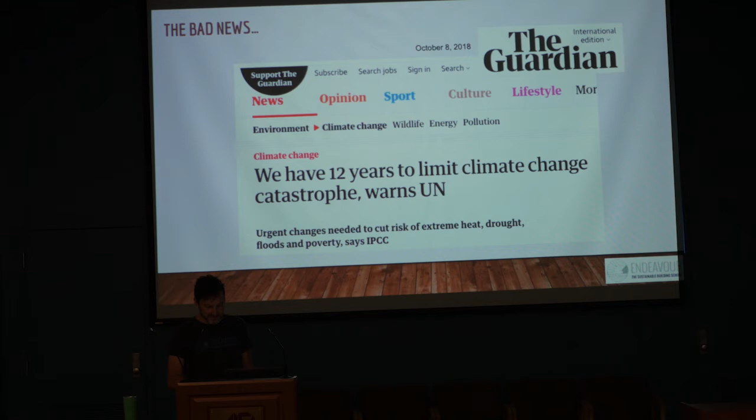I'm not going to spend any time browbeating you about climate change. Presumably, if you're in this room, you have some sense that it's real, and some sense that we should probably be doing something about it fairly soon.

But the thing that has really been motivating me—and I come from a practice where energy efficiency as a climate change response has been a big part of my work—is the realization that we can't just reduce the emissions from buildings and hope to have the kind of impact that we need on climate change.

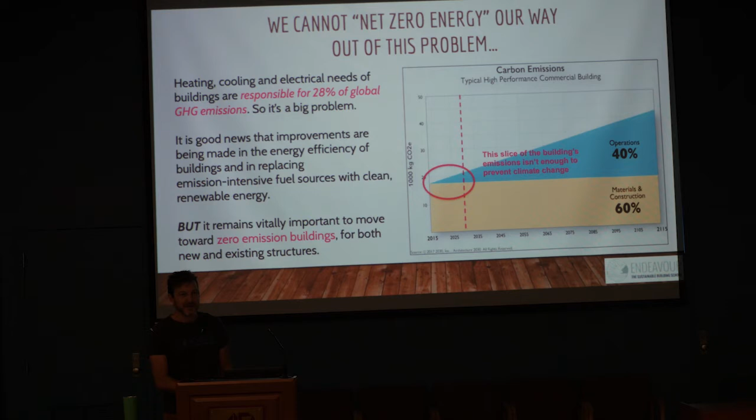So the term embodied carbon is what the academic community and the building world has sort of picked as a term for the emissions that are due to materials being harvested and manufactured. I think it's a terrible term because it makes it sound like we're talking about carbon that's in the materials, which we're not.

But the term embodied carbon is basically adding up—if say I'm going to pour some concrete—adding up the emissions of taking that limestone out of the ground, the equipment used to do that, transporting it to a cement factory, the fuel that goes into those kilns, the CO2 that comes out of the rocks as you're heating them up, basically all of those emissions the whole way along in order to create a material.

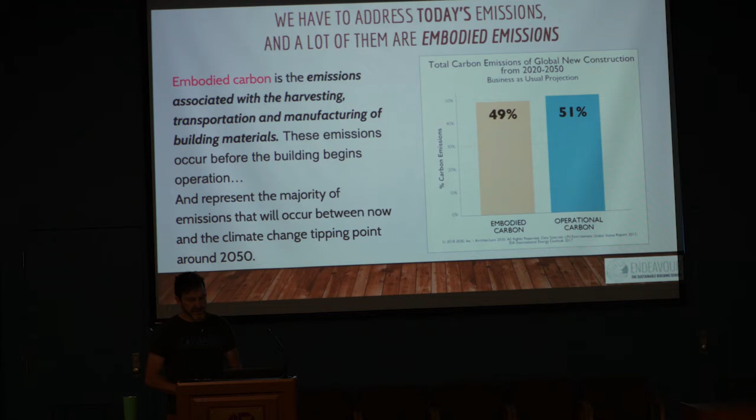And so you can see, again this is from Architecture 2030, their numbers, but between now and 2050, they're seeing that about half of all building-related emissions will be from making materials, and the other half will be from operating buildings.

So if we're going to address the whole notion of needing to build with materials responsible for smaller quantities of those emissions, we need to know the numbers associated with various materials, and how to know what's a good choice versus a less than good choice.

Mostly these numbers come from reports called environmental product declarations, or EPDs, and that's a sort of third-party document. A material manufacturer hires a third party to look at their entire production facility and come up not just with embodied carbon figures, but a whole host of environmental impacts.

So you can see there's global warming potential, which is what we're looking at for embodied carbon, but they also have acidification, eutrophication, ozone depletion, smog, and resource use across the entire spectrum of making that product.

But we're basically taking that GWP, that global warming potential figure, given for a particular unit of a product. So if I'm designing a building, I can say I'm using X number of kilograms of that product, or X number of square feet or cubic feet, however the global warming potential has been expressed, and multiply that out by the amount of material I'm going to use to get a sense of the carbon footprint of those materials.

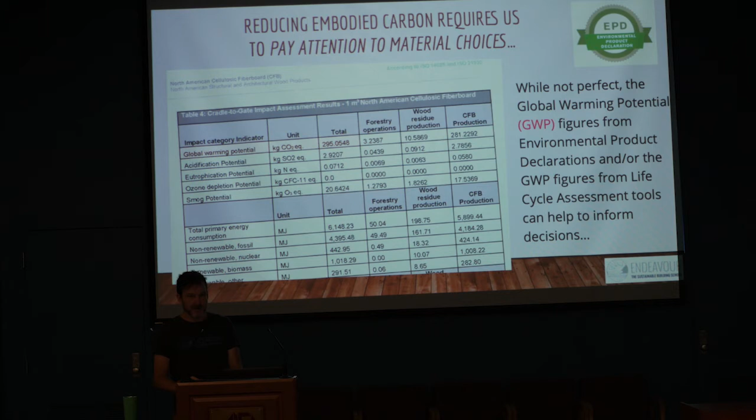So I had been working with these numbers for a while. I came across this notion of embodied carbon in 2012 or 2013. A British group at the University of Bath released a publicly accessible database of the embodied carbon of a really wide range of building materials. It's called the ICE database, the Inventory of Carbon and Energy.

At the time, I was writing a book called Making Better Buildings, where I was trying to give readers a bunch of definable categories for sustainable building materials. When I started the book, embodied carbon wasn't really on my radar—I don't think it was on very many people's radar at that point—but I stumbled into this database, and I thought, well, here's all these figures, I'll attach them to the materials I'm looking at.

It was a fairly easy thing to do. And then as I started to do that, it dawned on me that some of these numbers were really, really big, and kind of alarmingly large, and some were really surprisingly small. So I started doing this type of carbon footprint analysis for the buildings I was doing in my own practice, and getting some really interesting numbers.

In fact, most of my buildings were getting negative numbers, which I'll get into in a second. But that made me think, well, I'm just doing this like a citizen scientist—I should really go to school and learn how to do this properly. So 3 years ago, I started a master's degree at Trent University to specifically look at embodied carbon in buildings.

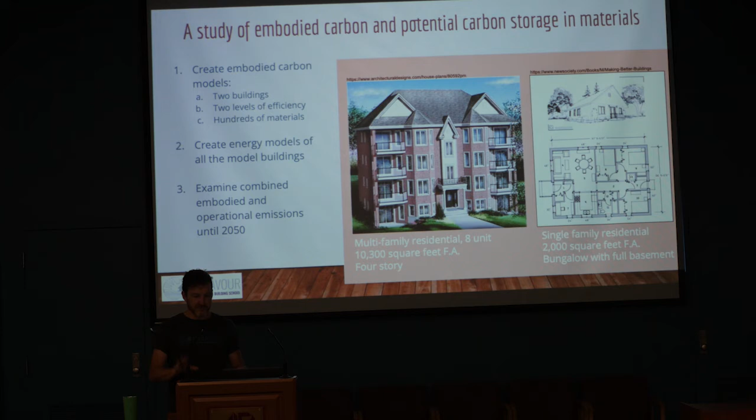And then I also did them as though they were being built to meet the net zero ready energy codes coming in Canada in 2030. So basically, what happens if you just build it at the minimums right now? What happens if you improve the energy efficiency? And I wanted to see, were there trade-offs? Were we actually causing more emissions by adding more insulation than it was going to save in operating? And then I also created energy models for those buildings, so I had an accurate sense of what the operational emissions would be for both buildings in both forms of energy efficiency. Then I put all the numbers together to see how the embodied and the operational emissions compared to each other.

So for the data nerds in the room, these are the R-value factors and some of the assumptions for both the energy efficient and the code compliant versions. Our energy codes in Ontario are actually pretty good right now. When I started the study, I was working with the previous version of our code, and the numbers were a lot different. But now in our area, R60 is the minimum in a roof, which is pretty hefty for most places, and walls are in the R24 range — it's a pretty good code minimum. The results looked more interesting in this study when I was using the older code, but there's still a lot of interesting stuff that comes out of them.

The floor area for the buildings was always kept constant. So if I was adding more insulation to the building, I was adding it to the exterior so that everything else for the building stayed constant.

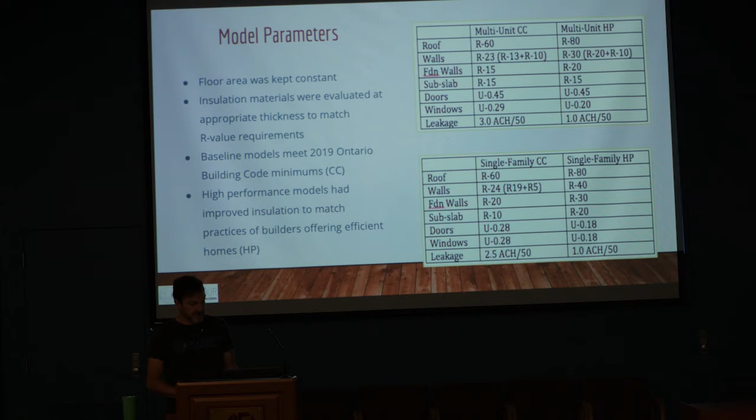So then I found EPDs for about 340 different building materials that you would feasibly use for buildings of that scale. Everything I was modeling had to be something that somebody had already made a code-approved building out of — even the more alternative materials all had precedent as being built in our climate to these code levels. I hunted down as many of these environmental product declarations as I could, and I ranked them in the order that you see here.

Sometimes the EPDs are done by an entire industry — for example, the wood industry, where everybody in the entire wood industry in North America collaborated on one EPD. So there's one set of figures covering all the member mills in North America. Some might have a much lower carbon footprint, some much higher, but it's an average. If there were no industry average EPDs, I would gather as many done by specific manufacturers as I could find and average those. And if I couldn't find any North American data, I would switch to European data, looking for industry average ones or averaging out a bunch of product-specific ones.

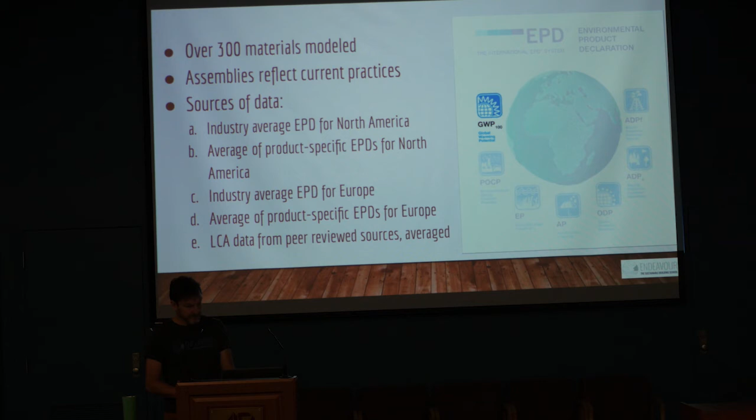So then, don't worry too much about soaking up all the numbers from this, but this is sort of what that initial embodied carbon analysis looked like. Everything on the left was on the higher end of the spectrum of carbon footprint — those were the options I looked at that ended up having a pretty high carbon footprint. On the right are the ones that are slightly lower. The ones I pulled out in bold are the best examples of both of those.

For example, for the slab floor with R15 of insulation underneath it, the biggest emitter was a typical concrete slab with XPS foam under it, responsible for 25 tons of emissions for this one 8-unit building. That's when my jaw started hitting the floor — when one element of one small building is responsible for 25 tons, you start to do the multiplication of how many of these things we build, and it starts to be pretty large. If you go down that list, typical concrete with HFC spray foam is 12 tons, the same slab with foam glass insulation is also 12 tons, and there's a few that get you down into the 10-ton range.

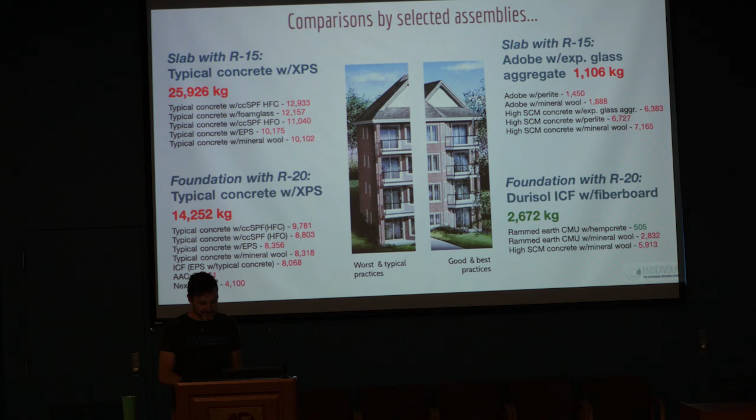But then over on the better material choices side, the number in green is a negative number. That's negative 2.6 tons, or 2,600 kilograms. There's also a hempcrete example underneath that's minus 505 kilograms, or half a ton. So that gets head-scratching. It's like, well, what is a negative emission? How can you have a material that is responsible for negative emissions?

What those are, they're plant-based materials. The reason they can have negative emissions associated with them is those plants have actually absorbed CO2 to build themselves. So that carbon was in the atmosphere very recently. They've pulled it out, separated the C and the O, and used the C to build their own cellular structure. So materials with negative emissions—if you have a plant-based material, there are still emissions associated with growing it, harvesting it, and transporting it. But in general, most of those plant-based materials, the carbon stored in the material outweighs the carbon emitted in the production.

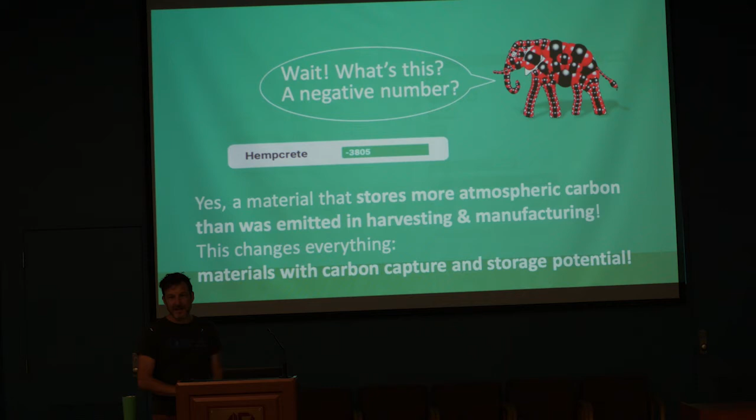And so we end up with a whole range of materials that actually have this sort of carbon capture and storage potential that become negative numbers in this kind of accounting, and it's a bit of a game changer.

I like to look at the pictures of all the machines that humans are inventing right now, like this thing here, that we're designing to pull CO2 out of the atmosphere and turn into useful products. But then all around us, all over the world, there are plants. That's what they do. They are the best CO2 extraction machines that have ever been invented. They draw down billions of tons a year.

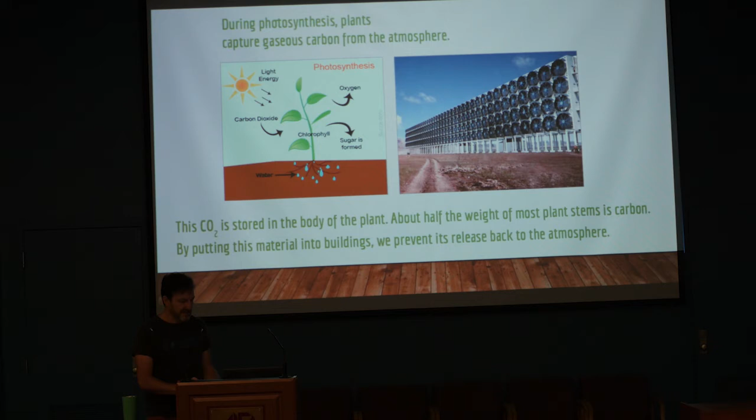So what we haven't been very good at as humans, but in particular as builders, is taking advantage of that—of seeing what we can actually do with these plant-based materials, how much of them can we feasibly incorporate into a building.

So now as we go through some of the other main categories of products and emissions, you'll start to see a whole bunch of those negative numbers showing up, and the negative numbers are all associated with plant-based materials. So it might be the cedar or the pine cladding. The clay plaster has a lot of chopped straw on it, so that's where its negative carbon content is coming from.

Down there on the right for the exterior walls, a wood frame with straw insulation and wood fiberboard sheathing has a pretty high negative number, but so does a number of other things, including hempcrete, fiberboard, cellulose insulation, and CLT, which is cross-laminated timber. There are all kinds of pretty feasible building materials we can use that have negative emissions.

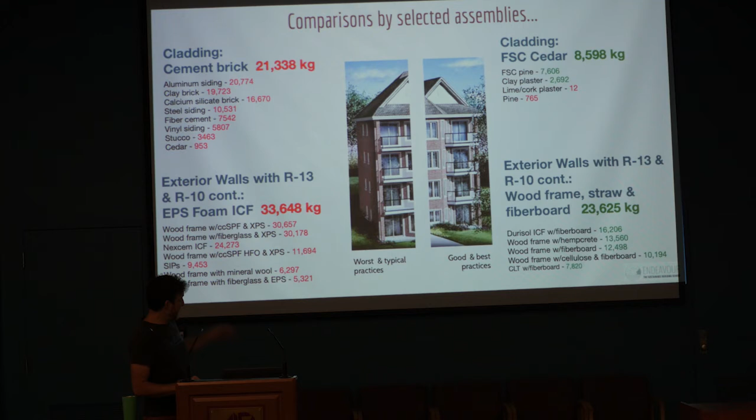That's in pretty stark contrast to some of the ones over on the left, where your typical cement brick on that building would have 21 tons of emissions associated with it, versus negative 8 tons if we clad it in cedar or pine. And again, on the exterior walls, buildings of this scale in my part of the world are almost all now being built with foam-insulated concrete forms, and the numbers for those are terrible—33 tons of emissions associated with making a wall that way.

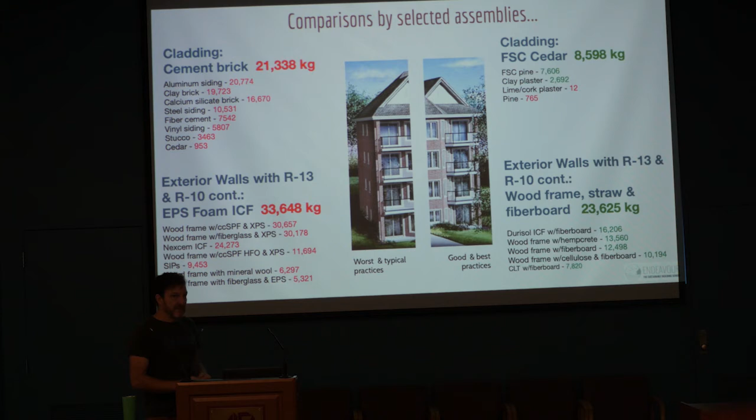So what this started to point out to me, and there's a bunch of different areas in the building, is that there are some choices that are really, really not good in terms of emissions and the effect a building has on climate change. And then there's a whole bunch that are not only not bad, but are actually positive for the climate.

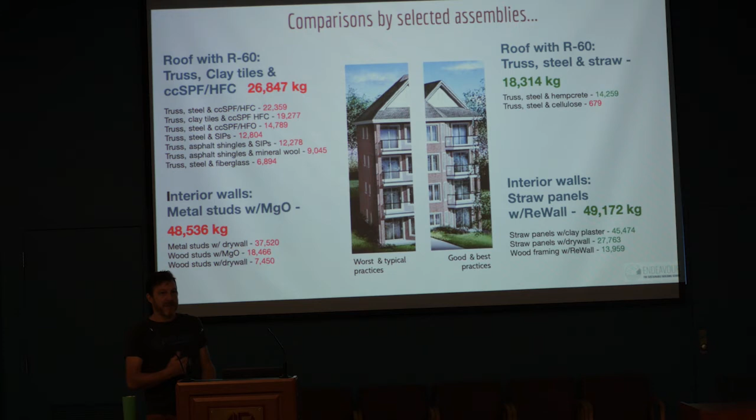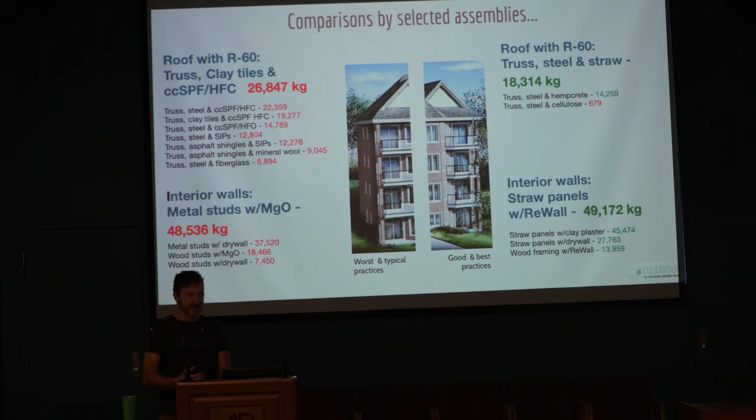They actually draw CO2 out of the atmosphere, which is something most climate scientists say we need—not only to cut our emissions, but to get a bunch of the CO2 that's already in the atmosphere out of it. And so these materials really point the way to being able to make complete building assemblies that on the whole are drawing down carbon.

That would include a concrete foundation with some foam insulation, wood-framed walls with fiberglass insulation on the inside, foam cladding on the outside, asphalt shingle roofs, fiberglass in the attic, vinyl windows. I did a survey of what is the absolute norm for my part of the world, and got that blue bar.

The yellow one, I chose all the lowest emitting or carbon storing materials that I could find that are commonly available in the market right now. So that would include things like cellulose insulation, wood fiberboard sheathing, various wood products in the building. That building had a metal roof, but things that are really accessible to pretty much any builder right now.

And it was interesting that those off-the-shelf choices turned that building into being just below the line. So it turned it from being an emitter into a small-scale store.

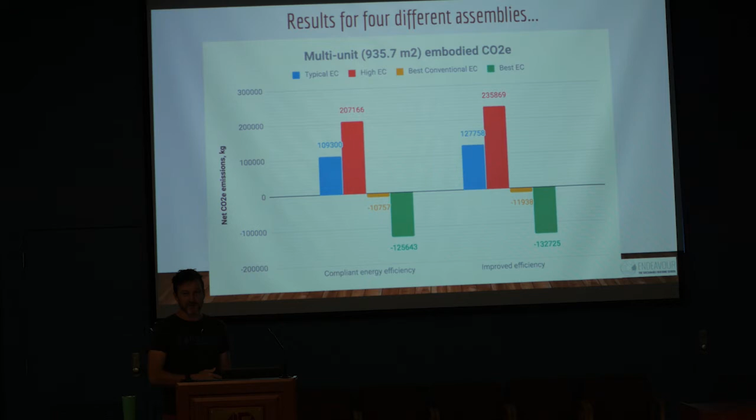But what this makes really clear right away is that you can't go wrong for the climate insulating more if your materials are carbon storing materials. So it's kind of a double win scenario. If you can put more insulation in that stores more carbon and it makes the building emit less carbon over time, that's a good scenario.

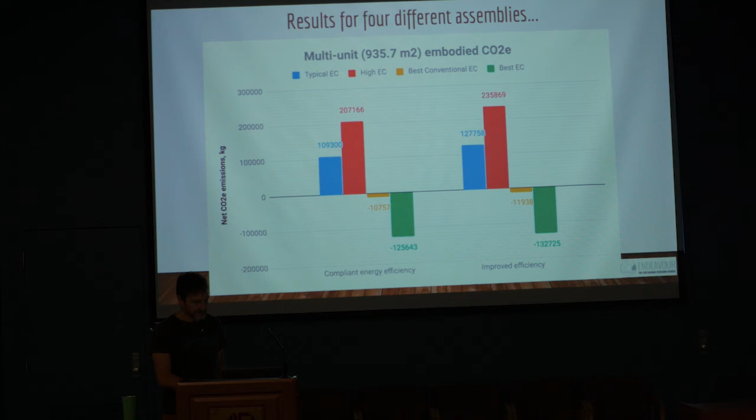So that's results for two small buildings. But what I want to do is just get a quick snapshot of how many of those types of buildings get built. Here I used US numbers—I thought you would be more interested in these. So in 2017, about 240 million square meters of this style of building got built in the US.

That was a fairly average year if I looked at the last 10 years or so. If we build the buildings as a mix of the red and the blue bars—the worst and the typical—they have about 345 kilograms of CO2 per square meter associated with them. Multiplying by that number of square meters of those kinds of buildings, it's 83 million tons of CO2, equivalent to about 23 coal plants worth of emissions.

So on the whole, like every small building, it's not that big a deal, but when we think about them collectively, it is a pretty big deal.

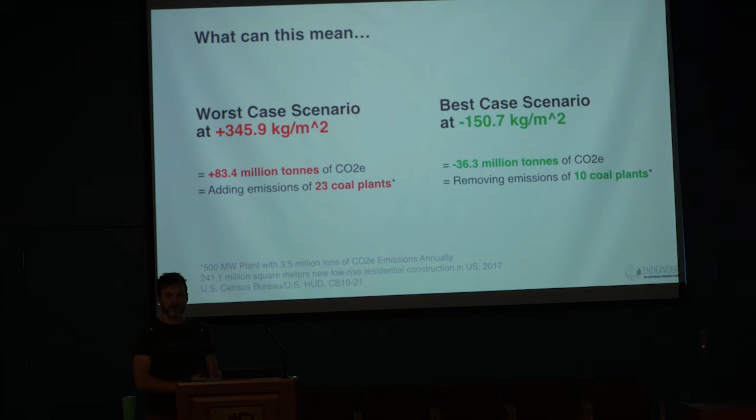And if we were to build all of those same buildings, that same square footage, in the best case scenario way, with lots of carbon storage in them, we would not only not emit that 23 coal plants worth of emissions, we'd store the equivalent of 10 coal plants worth of emissions in those buildings. So in 1 year of just residential small scale building, we could have the effect of basically taking 33 coal plants offline—it's big. In Ontario, we had 6, and it was the single biggest emissions reduction in North America ever. And that was a one-time reduction.

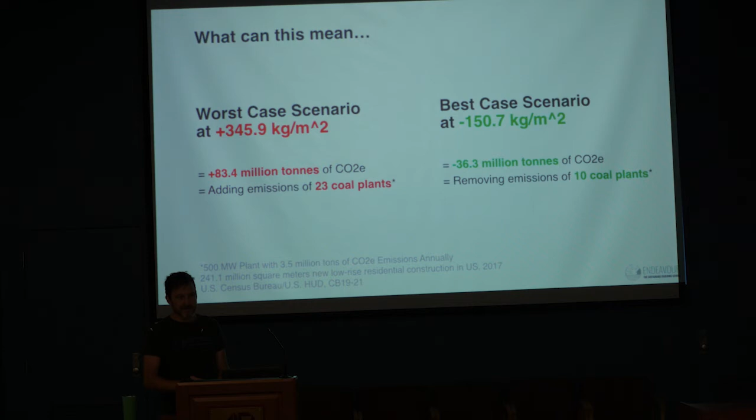This industry has the possibility of being able to reduce on this scale annually.

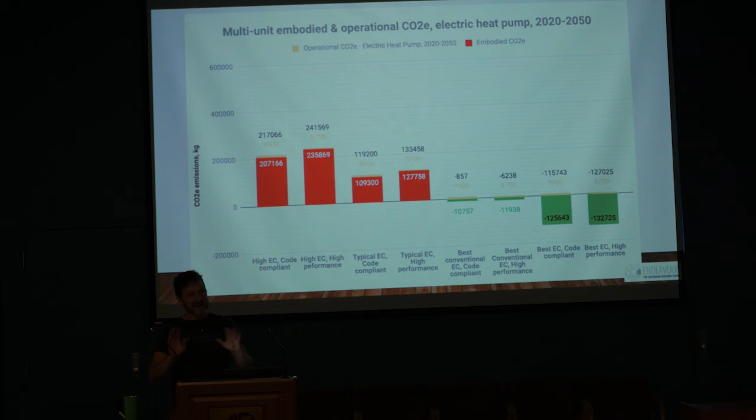We have a lot of hydropower, and we also have a lot of nuclear power, and there's a whole debate to be had about how clean is nuclear power really, but in terms of the actual emissions coming from running that nuclear plant, they're very low. So look what happens to those yellow bars - they disappear almost completely because the fuel that we're running the building on doesn't emit.

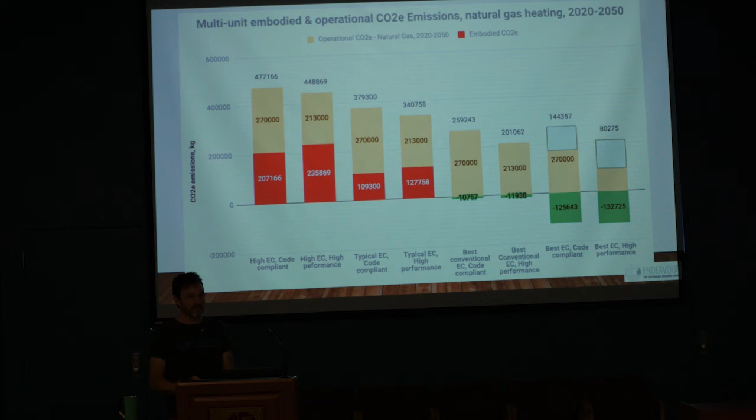So right away, this says to me, beyond even what materials we choose to use, the fuel source that we're using is the point of biggest leverage. If you can get these yellow bars down to the size of these ones by cleaning up your fuel source, that's worth doing.

And once you have a clean fuel source, what happens is that in our climate anyway, adding more insulation to that building isn't really having any positive effect on the climate. You can see on any of the ones on the right of the pairs, the one where we put more emissions into the building to add more insulation - they just carry that negative quality with them through their whole life because the operational emissions become so low.

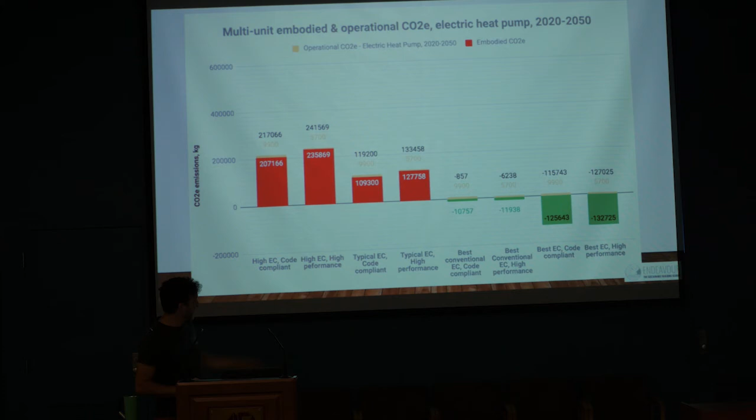And on the right side of the chart now we're talking about buildings where the carbon storage of the building is meaningful and lasts, in the case of the buildings on the right, almost 2 centuries. So if our operational emissions can be made small like this, which they can, that's just cleaning up our electricity grids, then these buildings become sites of really valuable and meaningful carbon storage, like the kind that you can count on at scale to make a big difference.

What sort of heat pump efficiencies did you use for that? So these are air source heat pumps with a COP of between 2.5 to 3. And the person who did the energy modeling for me did hourly modeling. So when it was really, really cold, the heat pump was probably running closer to 1, and when it was warmer, it was more like 3. So the figures are specific to the actual time of use.

And again, I think it's easy to just think, oh, heat pumps, they're the quick fix. What this graph doesn't show is that the refrigerant in most of those heat pumps is a really potent greenhouse gas. And if somebody messes up the installation and lets all that refrigerant into the air, you're now probably looking at this again.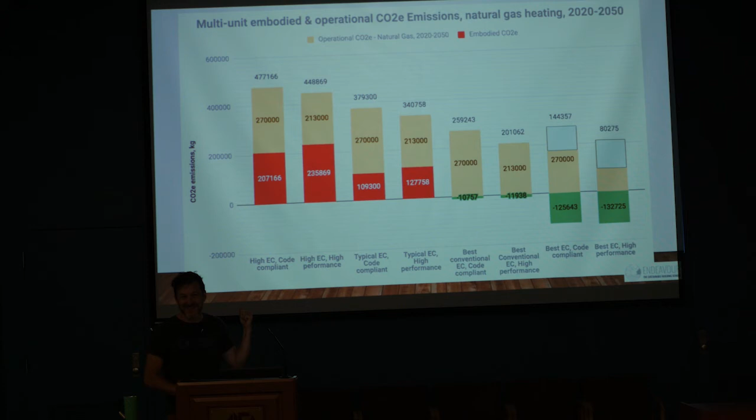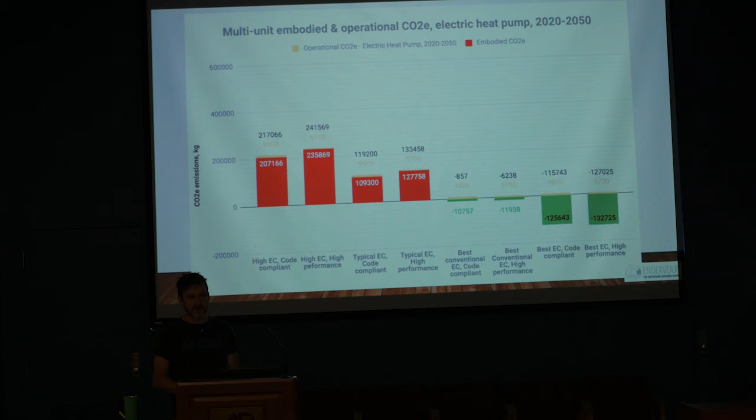This is one example of using clean energy. It may be that it's actually better to just use electric resistance heating, in which case we'd be using more electricity, but if that electricity is really clean, then there's not a lot of emissions associated with it. So there's lots that we could talk about and think about, but this really just points to the fact that cleaning up the grid and then using cleaner power for our buildings makes a huge difference and makes carbon storing buildings really meaningful climate action.

So then I graphed these things out so you could see. The very worst case scenario is a high carbon materials building using natural gas. You can see you start with the yellow bar, that's your embodied emissions. Over the 30 years, the red bars keep climbing, and that building ends up being just shy of 1,000 tons.

And then my best case scenario was the building starts as a storage medium. The slope up of the operational emissions is really small because of the heat pump and the clean grid, and it's still a site of net carbon storage by 2050 and remains so for a long time. So when you see those two examples side by side, there's a stark difference between them, and it points to what kind of impact we could have on the built environment by thinking about it this way.

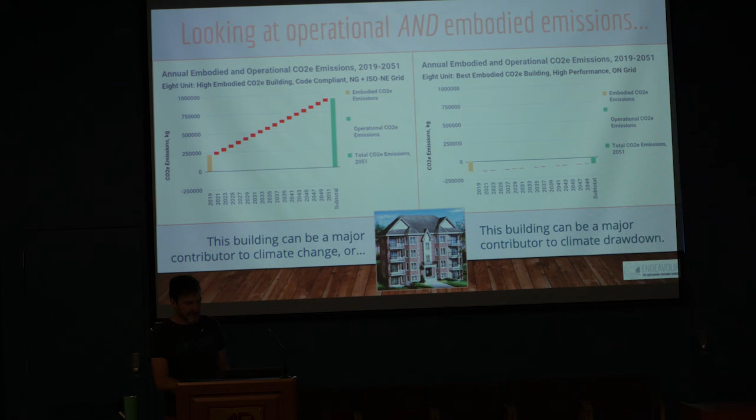So then these magic carbon storing materials that make a building into a carbon storage device instead of an emitter - there's nothing particularly magical about them. Most of them are either agricultural residues or forestry residues. I didn't actually count the carbon storage value of timber in any of my diagrams or in any of my case studies. The case for whether wood is a meaningful place for carbon storage or not is really complicated, and depending on who you talk to, you get very different answers.

The key issues around counting the carbon in wood have to do with this: when you take a tree down, just like all these other plants, it's made of about 50% carbon, so there is carbon stored in it. But by the time the tree becomes a piece of wood in your building, about half of that tree didn't make it into a building or any other product. If the other half only got burned, or rotted, or wasn't handled appropriately, then 50% of the carbon is now in the atmosphere and 50% is in your building. That means you didn't actually store anything in your building. It's sort of like a net neutral.

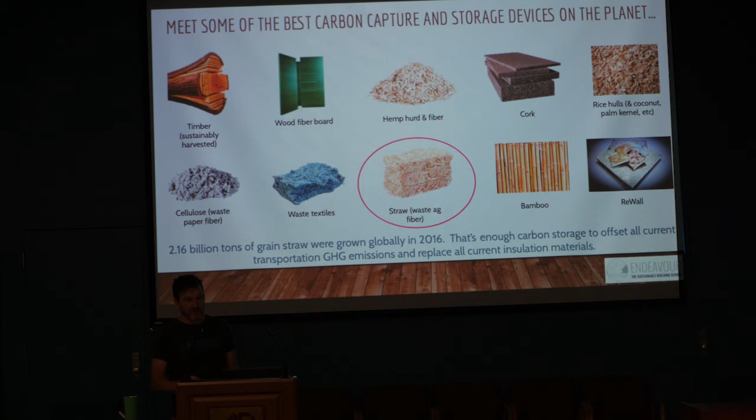One of the big concerns about trying to steer people towards doing things that are better for the climate is, are there unintended consequences? What we don't want is for people to go, oh, we should be building with straw, and we should cut down all the forests and grow more grain so we'll have straw to make houses out of. But what's interesting is that we have enough of all of these materials already. We don't have to reinvent anything. We don't have to start new industries. We don't have to plant new things. We can just take what we're already growing for food and use the byproducts in smart ways, like by putting them in buildings.

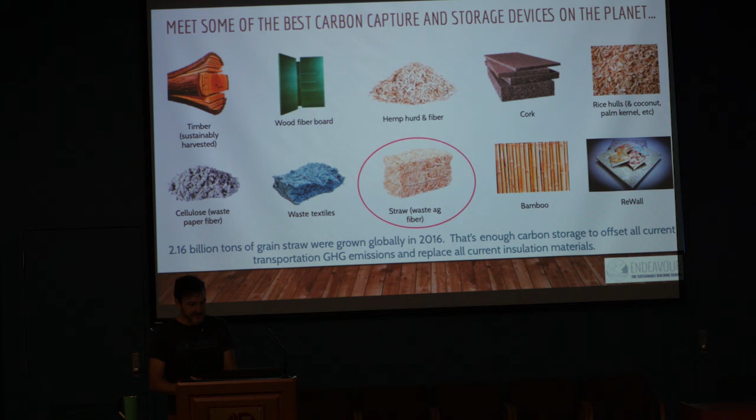There's also really interesting stuff going on around using more mineral-based materials, or carbon that was plants and has been pyrolyzed so that the carbon is now not in plant form.

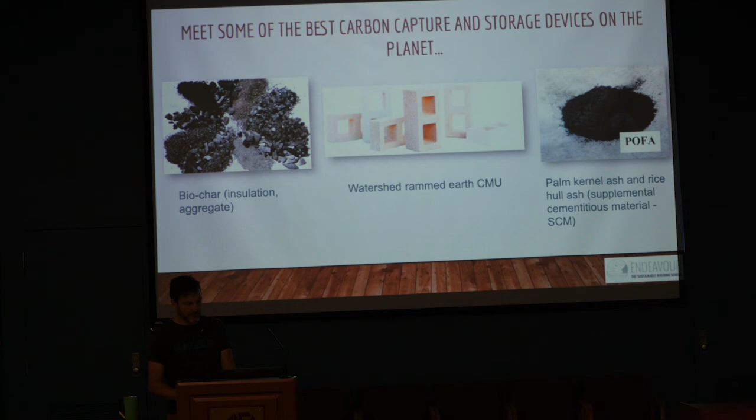Cement replacements like rammed earth and cement, Portland cement replacements like palm kernel ash and rice hull ash, things like that, where plant material becomes in a different form, that carbon gets used in buildings. There's not a whole lot of this going on right now, but it's a really interesting set of opportunities.

Really interesting things, like mycofoam, which is growing mycelium insulation. We did this on a project a couple years ago, and it was great to basically be able to grow materials. So even getting away from that whole paradigm of going out into nature, whether you're harvesting rocks or harvesting plants, you're still causing a whole bunch of ecosystem impacts. If you can get these things to grow independently of nature, then that's interesting.

Biomason, I think they're here in North Carolina. It seems to me, I've been talking to them. They're growing bricks—they've developed a microbe, put it into sand, and feed it, and it excretes calcium carbonate and sticks all the sand together, and you end up with a brick that was grown rather than relying on burning rock to make concrete.

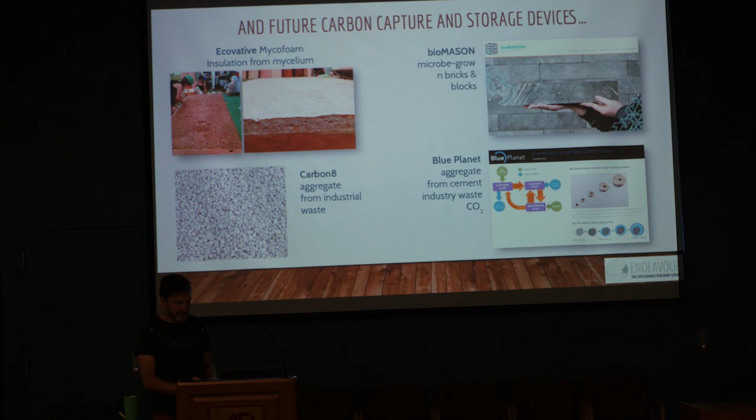There are quite a few companies now working on taking CO2 out of exhaust flues, especially from cement production plants, and recarbonizing that into aggregate—turning that gaseous CO2 into rock. Carbon8 and Blue Planet both have pretty good sized demonstration facilities going where they're doing that. So this opens up another whole set of possibilities for carbon storing in buildings.

And then this is just my own practice. Obviously I'm somewhat obsessed with the carbon in building materials and this whole notion of embodied carbon, but my own practice comes from being really concerned about all kinds of other things like ecosystem impacts, human health, and a whole range of things about buildings that I'm really keen on.

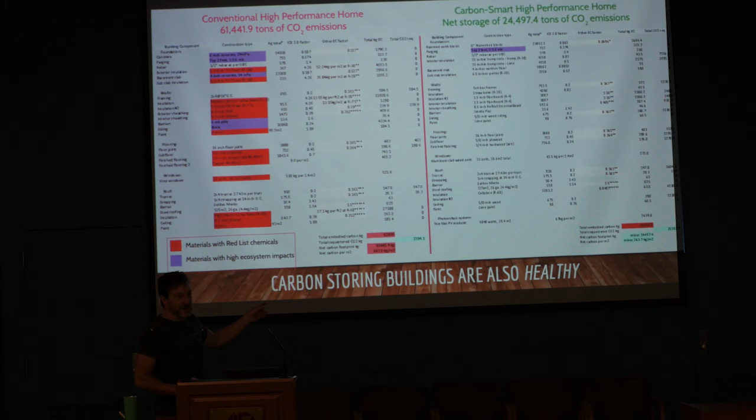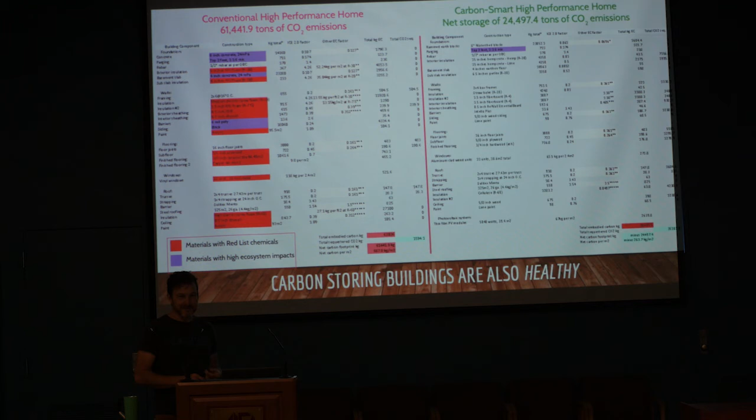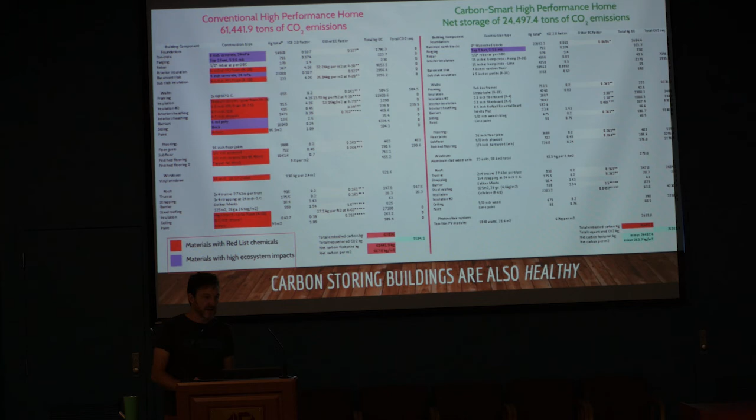The output on the right is my best case scenario building. What I love about approaching buildings from the idea of embodied carbon is that I get all the outcomes I want in all the other categories I care about by thinking really carefully about material selection from the embodied carbon point of view. I end up doing the right thing for human health, planet health, ecosystem health—all of those other impact categories. The materials that are better for the climate end up being better for us in every other way too.

My whole career has been definitely over on the margins of the building industry. I'm working with things like straw bale, clay plasters and floors, and hempcrete—materials that are definitely not mainstream. But I think they're not mainstream not because we can't make them mainstream. There's no rocket science involved in putting straw into a building. There's no rocket science involved in putting hemp into buildings. All of these things are actually extremely easy to do.

There are people who are already doing them at a reasonable scale. The manufacturing facilities have been developed. It's a pretty small step, and collectively, as a species, if we can do some of the things we've done, like building a large hadron collider, we can probably figure out how to bundle straw up into buildings even better than we're doing it now, which is pretty rough and ready.

Precast hempcrete blocks—there's a company that's about 3 years old up in Canada now making those. We've done a lot of work on prefabbing straw bale wall panels in our company, and there are a couple of European companies that do it at pretty decent scale. Stramit Strawboard is a compressed strawboard wall panel. It gets used a lot in Europe, where they have major production facilities.

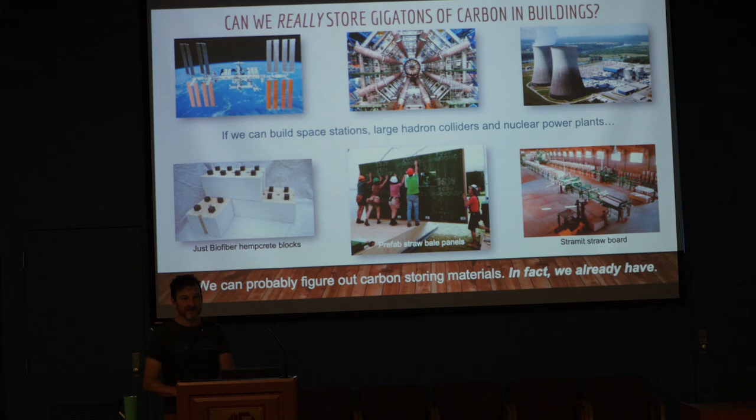So if you are interested in this, there's a group called the Carbon Leadership Forum, and they have this Carbon Smart Building Initiative that they're looking for individuals and organizations to sign on to, and their mandate is exactly what I've been talking about, to transform the built environment into a carbon sink instead of a carbon source of emissions, and to do so at a pretty large scale. So if you're interested in getting involved and learning more about it, there's great resources on their website.

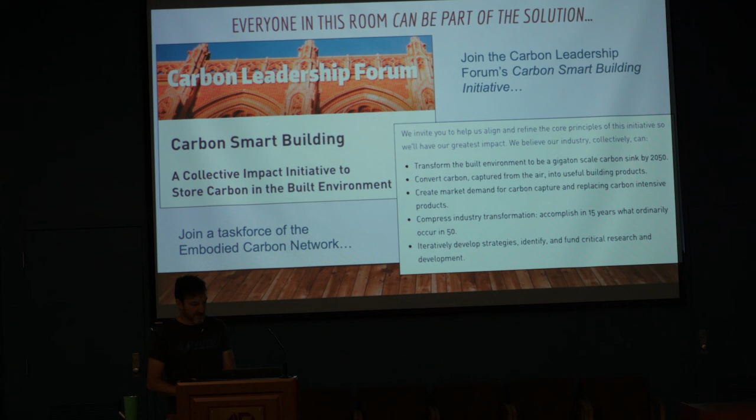It's got glass in its windows. There's no non-emitting glass yet. It's got a steel roof. It's got a whole bunch of things, nails and screws and stuff that have emissions associated with them, but there's enough plant-based materials that we actually offset those and still have net storage. And then, obviously still concerned with things like making the buildings energy efficient, thinking about renewable energy as part of that clean generation. So the building has PV on the roof and solar hot water and things like that. And then also, goals around having no toxic or even questionable chemicals in the building, really cutting down on construction waste. All of those goals are there. And we get 40 tons-ish of storage.

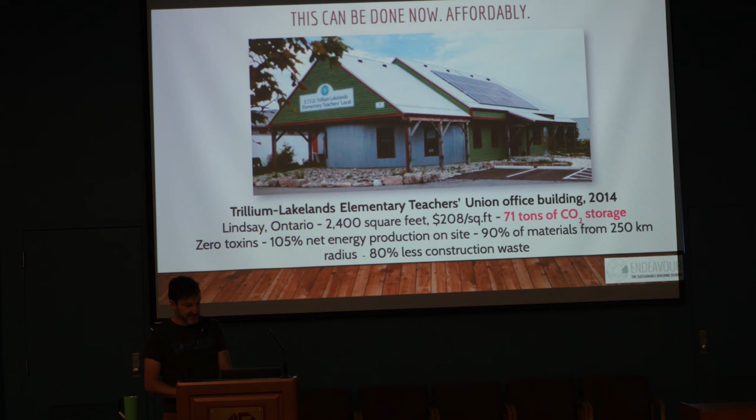That the university was involved in Toronto, and then took it down and put it up on a client's site. So that's another thing, looking at, if you take the notion that a building can store carbon seriously, then you think, okay, well what happens at the end of this building's useful life? Does all that carbon just get released?

Maybe it gets turned into biochar, but this building was us thinking, well, if you make buildings in a very modular way where they're easy to take apart and dismantle, if this person doesn't want this home or a bigger development is coming along, if you can easily take that building apart and rebuild it somewhere or put the parts of it into another building, then that carbon stays out of circulation for even longer. So I have a particular fascination with that kind of modular approach.

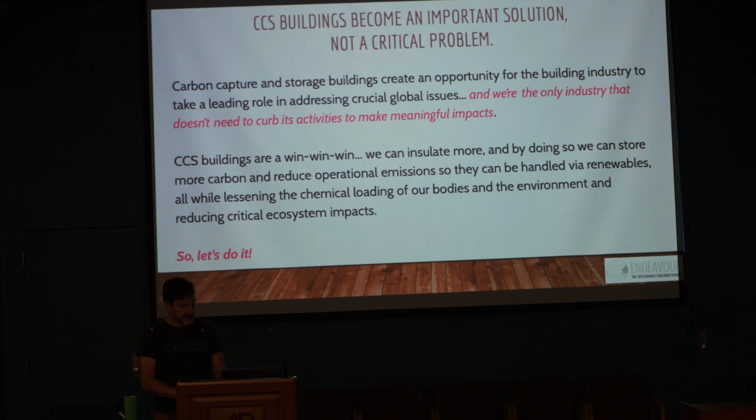We're just asking them to make them out of smarter, better materials. But in fact, growth in the built environment, if we're doing it with carbon storing materials, is actually potentially really beneficial to climate change rather than detrimental. So it's the only industry that we can make that ask of, like, don't stop doing what you're doing, just do what you're doing in a better way, and the same level of employment and opportunity and economic production is still there. So I think it's a really interesting opportunity for this whole sector to be thinking about seriously.

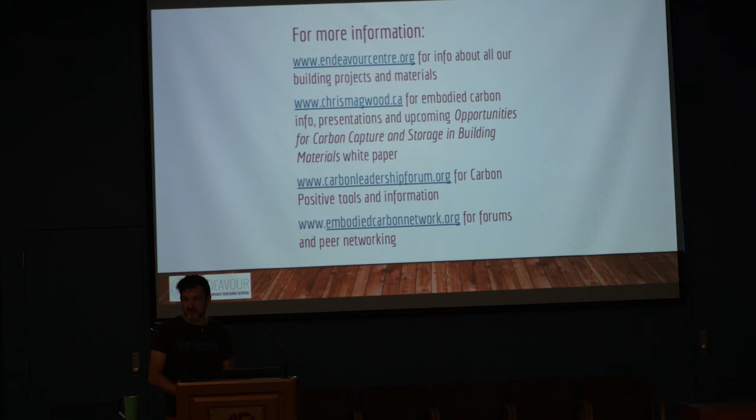What's the cost differential between the commonly used materials that have a high carbon emission versus the ones that you're speaking about with the plant-based materials?

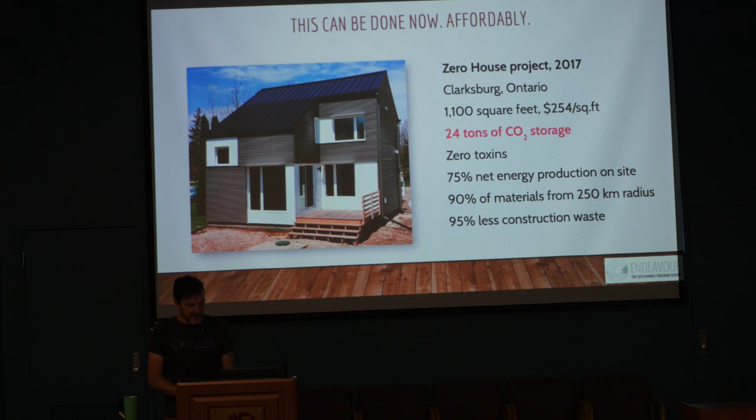Right, pretty small. Like right now, I've got the cost figures that we were able to do these things for. So a prefab custom house for $250 a square foot, an office building for $210, this house for $170.

It's not a huge difference. The biggest difference right now is not that the materials cost more, but that a building company has to invest more time in finding them, because you're not just going to Home Depot, you're finding a farm and talking to that farmer. So it's more the things that make it more difficult aren't money, it's time and availability, code issues, things like that, all of which you can overcome, and all of which the building industry can overcome very quickly with concerted effort. But right now, the early adopters, they're not paying more for the materials, but they're paying more in their time and research and code applications and things like that to make it happen.

A question on your books. I'm not planted here to say that, but I was curious, what's the difference between the 2014 Better Buildings, Making Better Buildings, and the newer one, which I don't remember?

Yeah, so Making Better Buildings is where I stumbled into all this data. It's really a materials book. It's got every material that I could track down any information on, both conventional and alternative materials, with things like the carbon footprint, costing, how codes work, where and when you would want to use them. The other one, the Essential Sustainable Home Design, is more about how to think about what you want to build and how you might want to build it, but it's not as deep a dive into a whole range of materials.

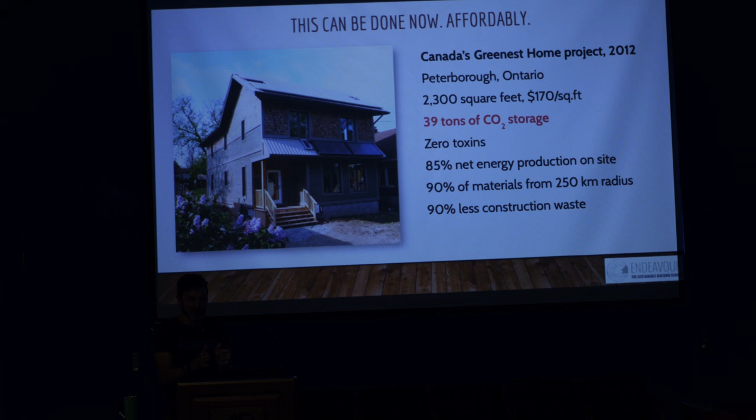So it's good in the window of time where we're doing what we're doing with it, but all those heavy metals and stuff will come out at some point. Like up in my part of the world, we don't have fly ash because there's no more coal burning. So steel slag is a cement reducer, has the same properties, same idea. You're heating up all this ore to get the iron out, but you fired it the same way you'd fire limestone to make Portland, so it's reactive in the same way. Those things make some difference for sure.

A better difference would be palm kernel ash or rice hull ash, where you're taking an ag resource that is stable, that is not toxic when it comes out, and not having to burn coal in any form to get it. But also hard to find, right? You're not going to call up any batching plant and ask for 20% rice hull ash concrete. But we could - that's the whole idea here, we need to start pushing for those things. They exist, the science is there to improve it, and the stocks of them are there. It just has to be a reason for people to want it, and I think lowering that carbon footprint is hopefully going to be a reason that'll start to happen.